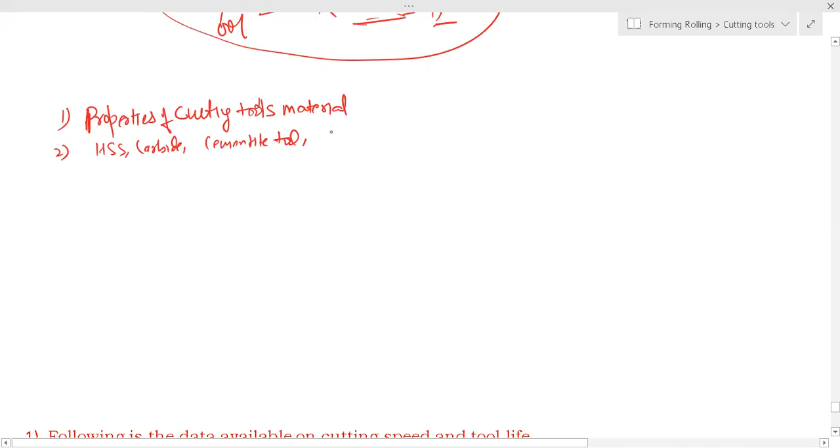We have started cutting tool material. We discussed cutting tool material properties, which we have completed, properties of cutting tool material that we have already completed and talked about. Then second, we talked about different types of tools, like high speed steel tool, carbide tool, cementite tool. We have talked about cubic boron nitride tool, CBN tool, and diamond tool. So properties of cutting tool material we already discussed.

I started from red hardness or hot hardness, then yield strength, ultimate strength, thermal conductivity, non-corrosive properties, everything we have already discussed. We have already talked about high speed steel tool, carbide tool, cementite tool, cubic boron nitride tool, and diamond tool.

We also talked about how you have to remember at least cutting speed, Vickers hardness, and the peculiar characteristics of each tool. At least 5 to 7 points you have to remember and understand for each.

For example, high speed steel tool has good toughness, but carbide tool does not have good toughness, though carbide tool is harder than high speed steel tool. Cubic boron nitride tool has the highest cutting speed. Diamond tool fails by rupture of the tool point. I have already talked about this in the last class, right? So you have to think like that.

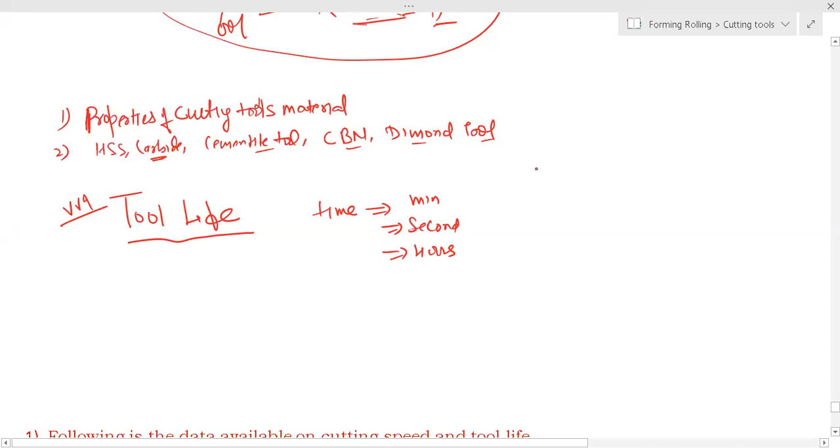It means one tool, we took a tool, we started machining, and suppose machining speed, or we call it cutting speed, is suppose 200 meter per minute. So at this speed we started, we took the tool, and we'll see when

first sign of failure. Failure does not mean complete breakage or complete rupture. Any sign of failure, it may be wear, tear, or blunting, anything. It means failure. It doesn't mean it is breaking.

Means if its function - cutting function, right? Function of a tool is to cut the material. If it's not working properly, it is not able to cut the workpiece, then its function has lost. Tool is to be replaced, or tool is not working properly.

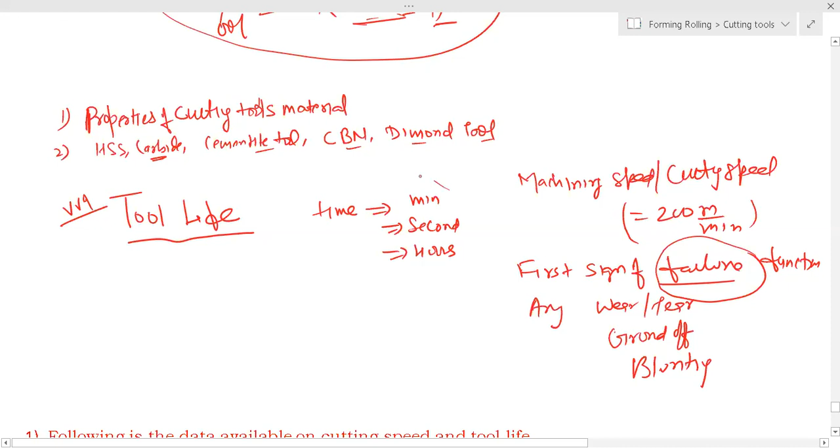So we have to measure time. Suppose it gives 30-minute time at 200 meter per minute. It means if cutting speed is 200 meter per minute, tool will last for 30 minutes, means half an hour. That means life of tool is half an hour at this speed.

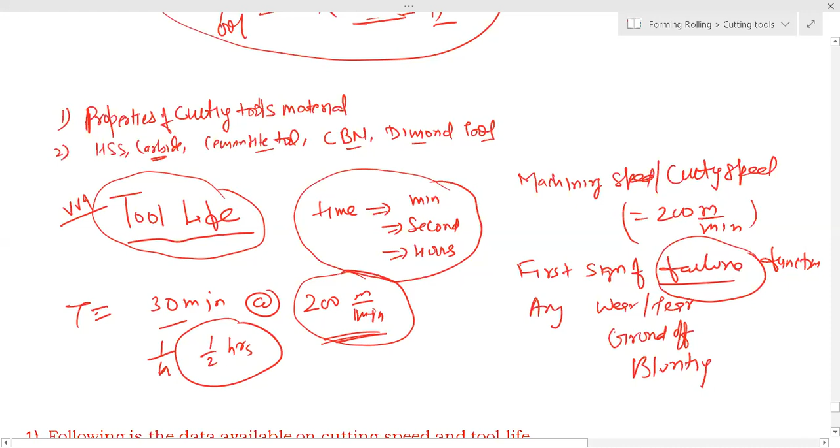So basically, I will erase all these things. Anybody want to write? You can write, I will erase. So

Life of tool is 30 minute at 200 meter per minute. That means after 30 minutes, you have to change the tool.

Change the tool means either you have to regrind it - what is happening, regrind it - or you have to dispose it. Disposal, you have to throw it.

So number of tool change - one term is called number of tool change. It means suppose if you want to machine a job and that requires 2 hours to complete the work, you require 2 hours total time. And tool life of a tool is half an hour at some fixed speed, suppose 200 meter per minute.

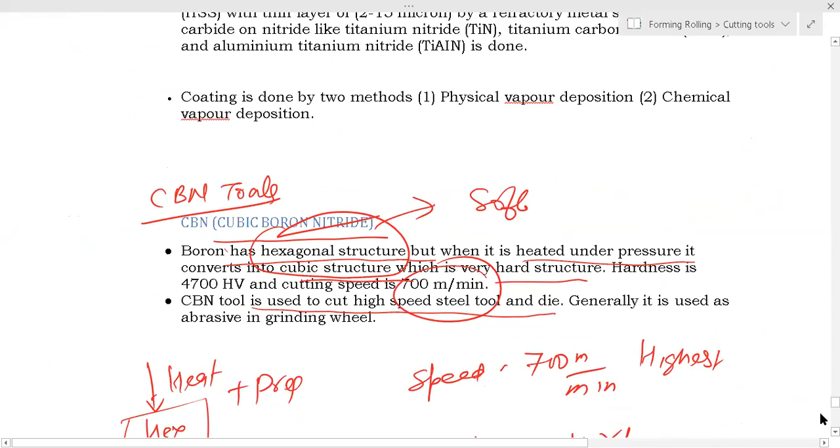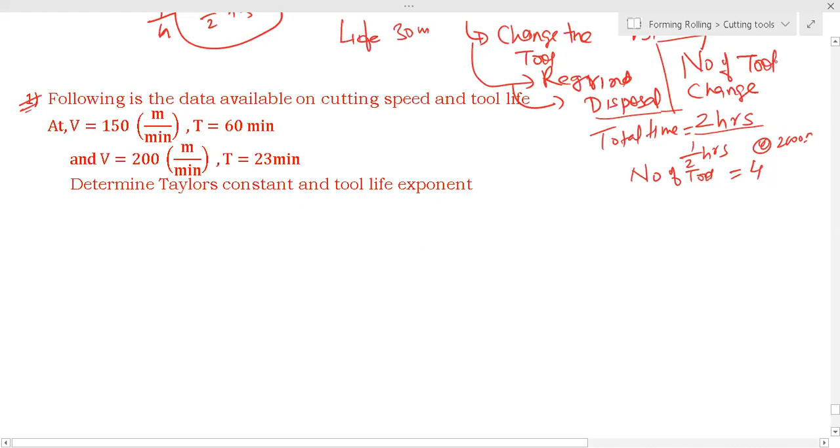Fine, so don't see now this problem, I mean this problem. Let us - so one is called generalized Taylor's tool life equation.

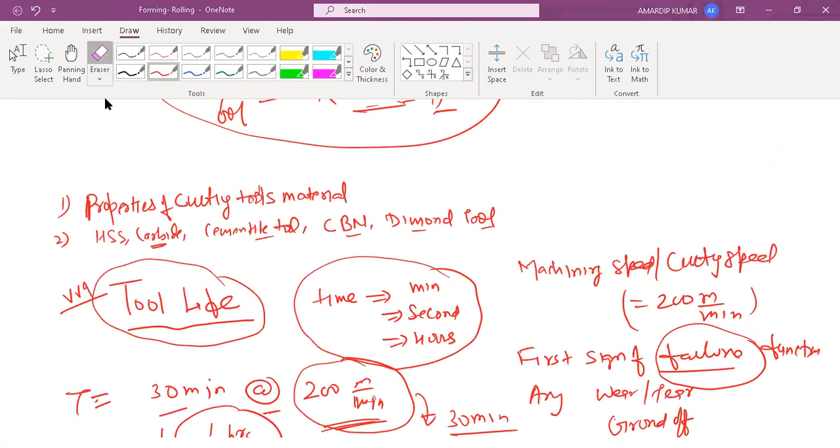This note, I don't know whether the note is slow or my system is slow.

So tool life definition we have understood, whether it is number of tool change or number of regrind, or

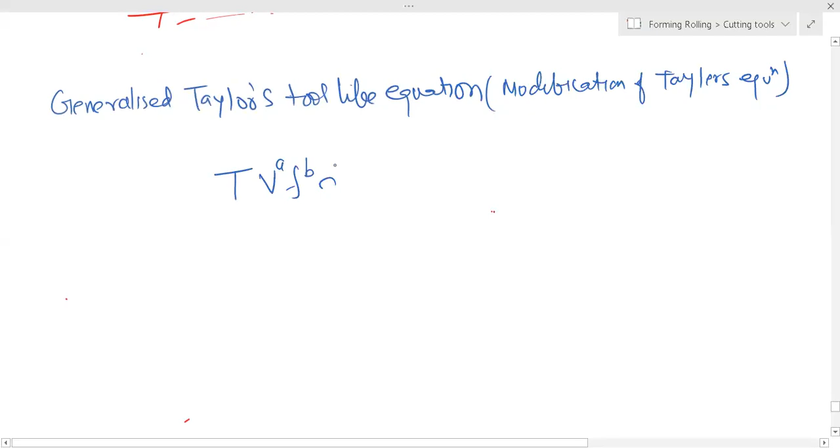What he said - where T is tool life, it will be in minutes suppose, and V is your cutting speed. It may be some meter per minute. You are doing cutting speed right now. Speed.

Then F is your feed, it is suppose millimeter per revolution or millimeter per minute. There are three types of feed that I will be teaching you later. And D is equal to depth of cut, it will again be in millimeter. It is depth.

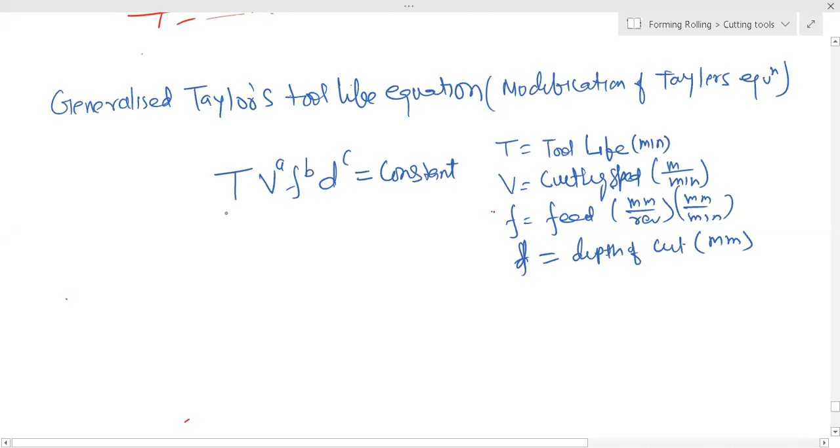So basically, tool life is a function of velocity, feed, and depth of cut. And again, A is greater than B, greater than C.

So T is equal to constant divided by V^A, F^B, and D^C. From this, we observe that anything increases

Sir, V is millimeter per minute or meter per minute? Meter per minute. Meter per minute. I have written, Nikhil. I have written. Okay.

So anything, whether it is cutting velocity, feed or depth of cut, if anything increases, tool life decreases. So anything increases, because everything is in a denominator.

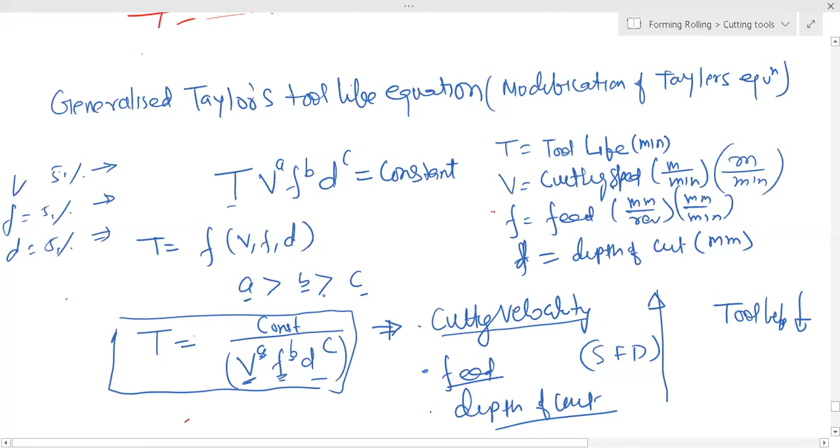But suppose velocity increases 5%, feed increases 5%, and depth of cut increases 5%. Which effect, the velocity increase, feed increase, or depth of cut increase, will affect tool life more? That will be decided by this power.

So here we see A is greater. So the effect of velocity on tool life will be maximum, then feed, then depth of cut. Now is it clear?

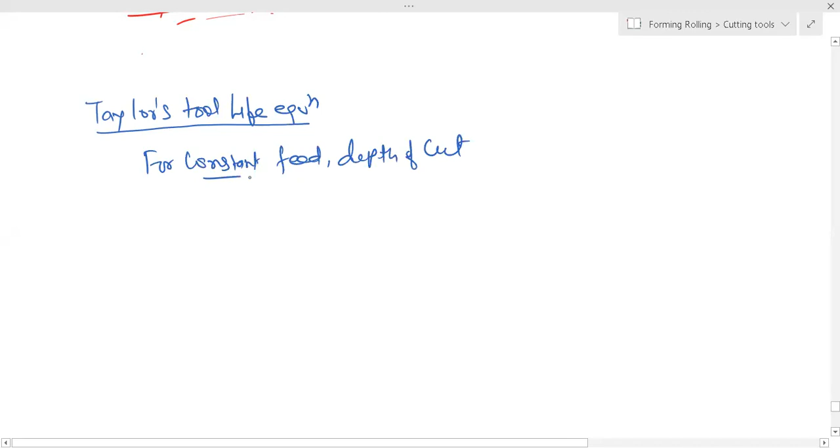For constant feed and depth of cut, meaning they are constant, we are not changing them, tool life becomes this. So here, for constant feed and depth of cut, there is a very simple relation, where n and C we call the machining constant.

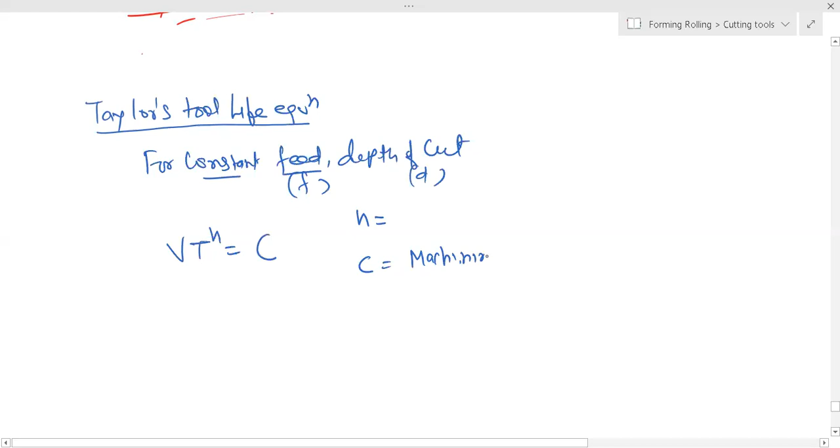Machining constant depends upon both the tool plus the workpiece. And this is called the tool exponent, which depends only on the tool material.

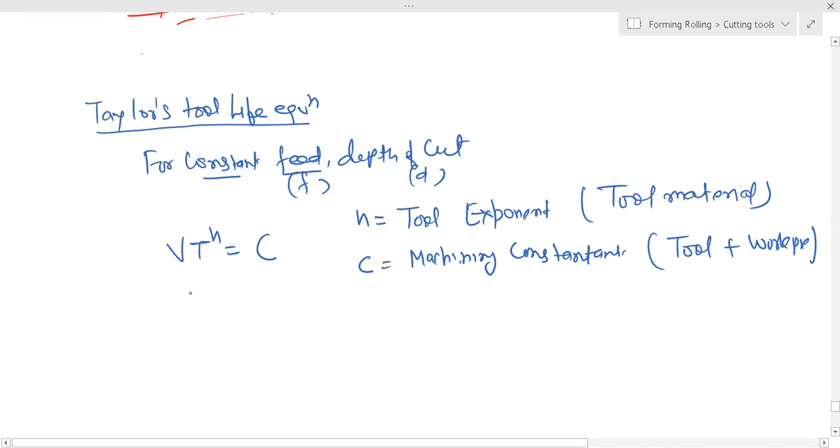So we can write this as a constant. So for two conditions, we can write like this: V1 T1 to the power N in one condition, and another condition V2 T2 to the power N.

This means at this cutting speed, this is the tool life; at cutting speed V2, this is the tool life. Because C will remain constant and N will remain constant, since the tool is the same. And this we can also relate, because V equals pi D N by 60.

So we can relate it with RPM also. So tool life can be expressed in terms of RPM, number of revolutions, as N2 T2 to the power N. And this can also be written in terms of nose radius, which I will discuss in the tool geometry details.

So VT to the power n equals 331 R raised to power 0.244, it means nose radius. R is your tool nose radius.

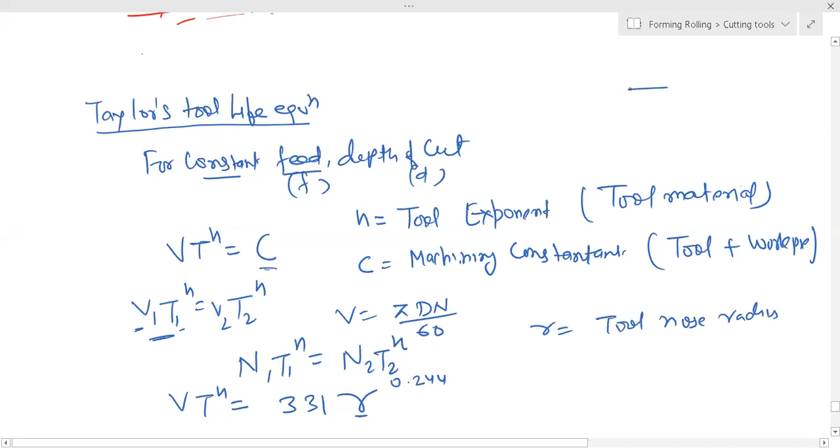Basically this is nothing, but when we discuss tool geometry, this is the nose radius R. So three views will be there: one will be the isometric view, the 3D view of the tool; then side view, top view, and front view. In every view there will be some angles, two angles, that we'll discuss.

So nose radius is in millimeters. So nose radius increases means tool life increases. So basically you have to remember this.

This is for constant feed and depth of cut. This is the relation. And for two states or conditions, if V1 is the speed and T1 is the tool life at this speed, and V2 is the speed and T2 is the tool life, we can relate like this also, V3, T3 to the power N, like that.

Again, rotational speed N, because diameter is constant, so we can write Taylor's tool life equation in terms of N, your RPM, cutting speed, or we can write it also in terms of nose radius. And this relation looks very simple, right? No, nothing much.

GATE will ask you, tell me the effect of nose radius on tool life. So as nose radius increases, tool life increases.

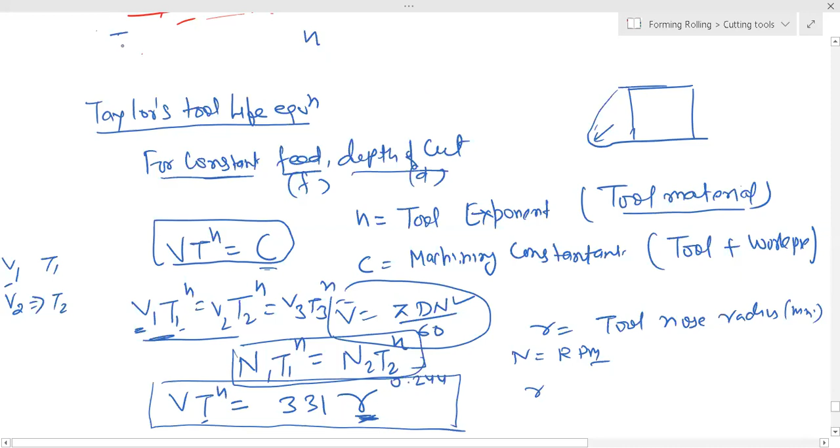This n value only depends on the tool, so this n value is different for different tool materials. For example, tool is here, I am writing, making a table - it's already there in the study material, but I am writing again so you can understand. Suppose this is your tool and this is your value of n.

So if the tool is high speed steel, the value will be 0.08 to 0.2. If it is carbide tool, the value will be higher, 0.5 to 0.8. And when it is ceramic tool, it will be 0.8 to 0.9 something - in your notes please correct this, there was a copy paste problem. I had written the same value of n for ceramic tool, but no, it is more. So when the value of n is more, what does that mean?

Value of n more means - you have the relation V T^n equals constant. So T equals constant divided by velocity to the power 1/n, right? So n more means this quantity is less, right? This quantity less means this relation holds - you have to understand, it basically gives the slope. So for high speed steel tool it is less, then it increases for ceramic.

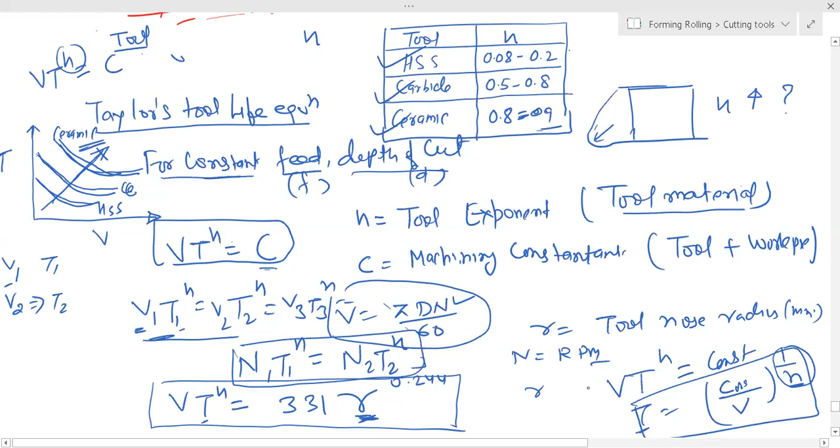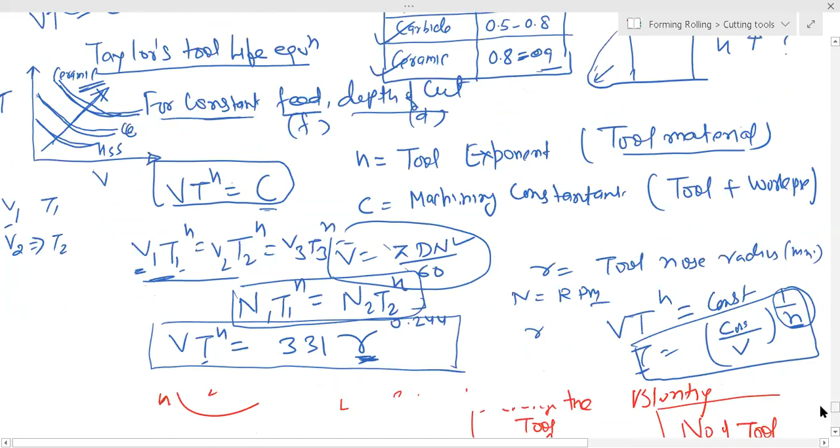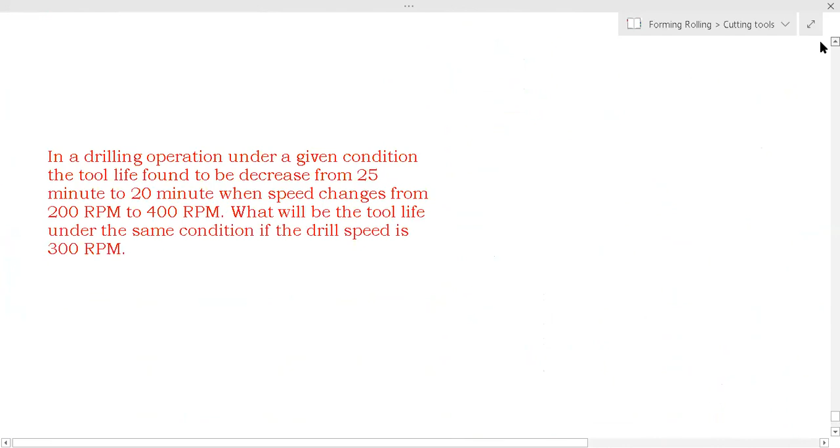Now we have some problems, we'll discuss some problems. First problem is in red color, right? Now what is that problem?

So this is our problem: following is the data available on cutting speed and tool life. You have velocity V and tool life this much, and velocity V and tool life this much. So determine Taylor's tool life constant, that is C, also called machining constant, and tool life exponent, that is n. So V T^n equals constant, so you have V1 T1 and V2 T2, n, constant, right? So you have equation 1, equation 2 - two equations and two unknowns.

You can solve it. So V1 is 150 meter per minute, and T1 is 60 minutes, and V2 is 200 meter per minute, and T2 is 23 minutes. You see, when speed increases only 50 meter per minute - change in speed is only one third, right? It was 150, now 200. But earlier tool life was 60 minutes, now reduced to 23 minutes. It means the curve is like this.

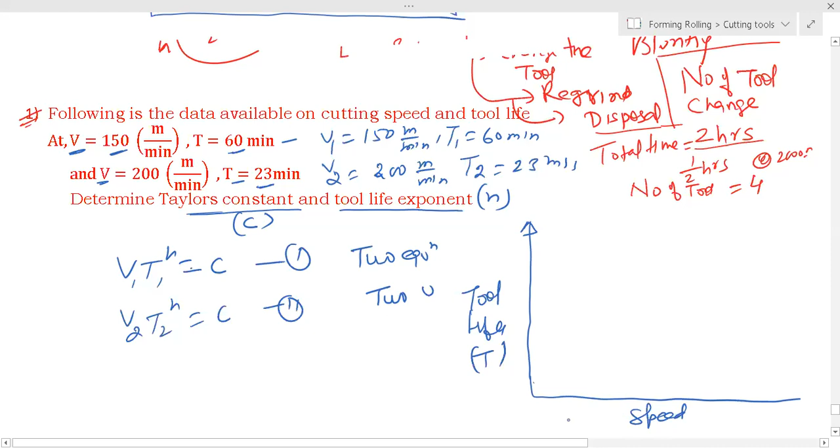This is your tool life, that is T, and this is your speed, cutting speed or machining speed - don't confuse, it is sometimes called cutting speed or speed, that is V. So it decreases like this.

It means exponentially, right? Because the relation is this: relation between V, T, and C. So it is like this curve, it decreases.

So there will be a sudden change if you change this much. If speed you are changing this much, tool life will change this much. So it is not linear, it is exponential decrease.

So when speed is more, a production engineer will always look for higher speed, because if speed is more, production is more, in less time they can machine more components. But when speed increases, tool life decreases, there will be frequent tool failure, and every time you have to change the tool, that requires time, that is tool change time.

When we discuss economics of machining, everything will come into picture, whether tool cost, tool changing cost, machining cost, raw material cost. Finally we will minimize to find what will be the cutting speed for optimum efficiency and what will be the cutting speed for minimum cost. Everything will be discussed in economics of machining.

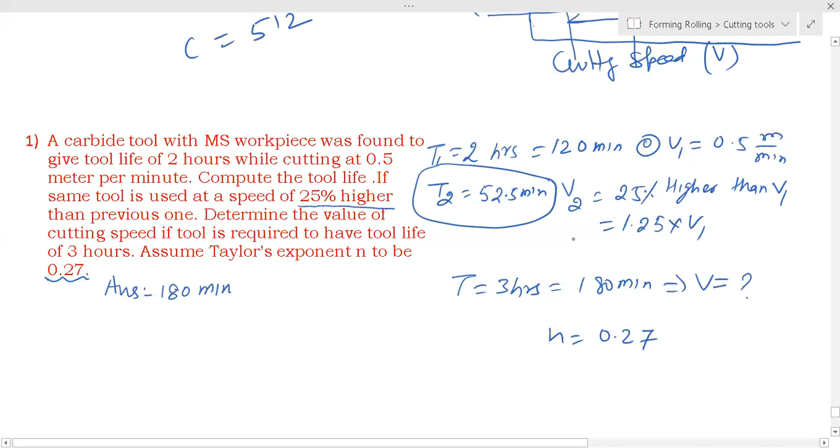52 minutes, very nice Ashish. Ravichandran ji, nice. Sir, I am confused by this question because it is asking to calculate speed while it is saying it.

Compute the tool life, there are two questions, man. First they are asking about the tool life. So up to here you have one question, and then you have another question. This is question A, this is part B.

Yes, 52.5 minutes is the answer, you got this. What about this velocity? Now using this, you calculate N, calculate C here, then you are having N and C value. Putting this, then you can calculate V.

What is the V answer? B. V is 0.5. What is the V? 0.448.

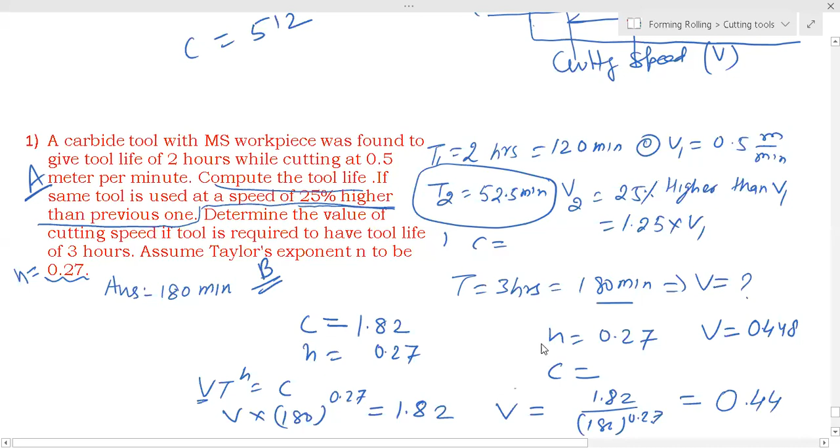Okay, next. Solve this question. This is the question. In a drilling operation under a given condition, tool life found to decrease from 25 minutes to 20 minutes when speed ranges from this to this. What will be the tool life under the same condition if the drill speed is 300 RPM?

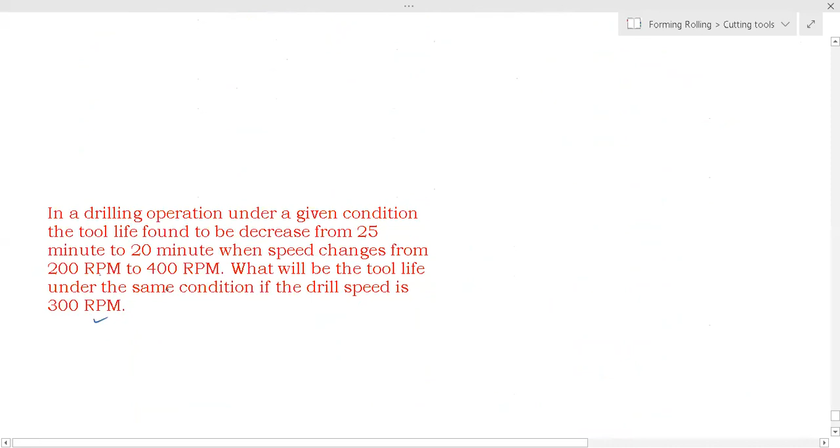So tool life found to decrease from 25 minutes to 20 minutes. This was at 200 RPM, and this was at 400 RPM. Right now, what will be the tool life when RPM N is 300 RPM?

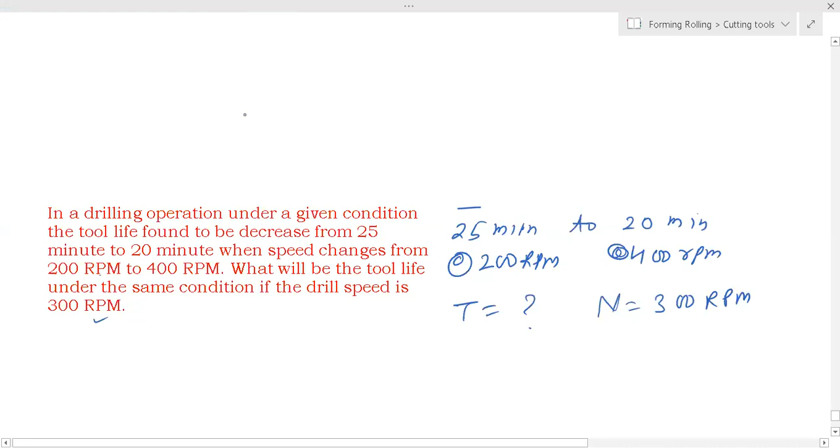So simple: N1 T1^n is equal to N2 T2^n. What is it? N2 T2^n is equal to N3 T3^n. So you have to calculate T3. From this you calculate n. Then finally put in this equation to get T3.

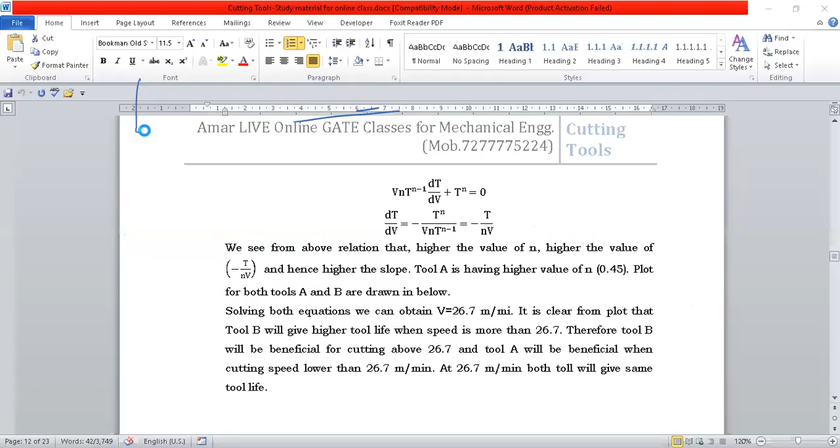So you have N1 is equal to 200 RPM, and T1 is 25 minutes. Then you have N2 400 RPM, and T2 20 minutes. You have N3 300 RPM.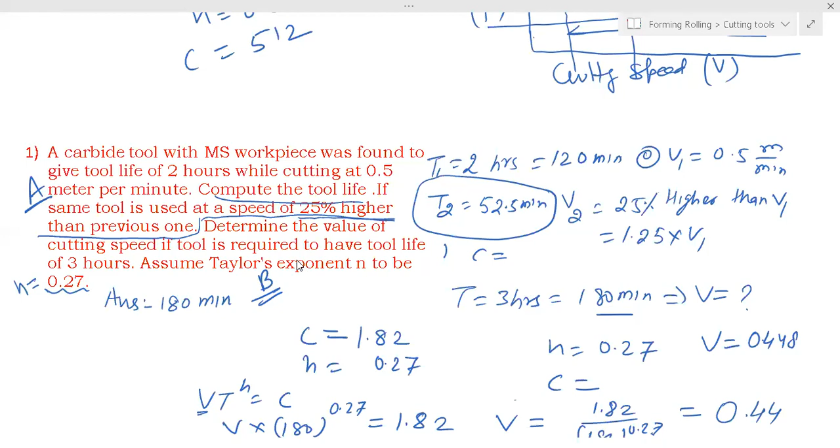So T3 will be between 25 and 20. So if the answer is between these two, then it is fine. 21.9. So the answer is 21.9.

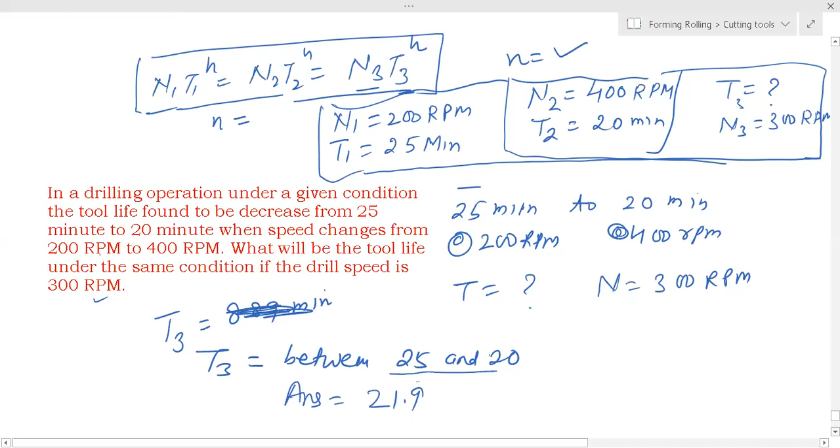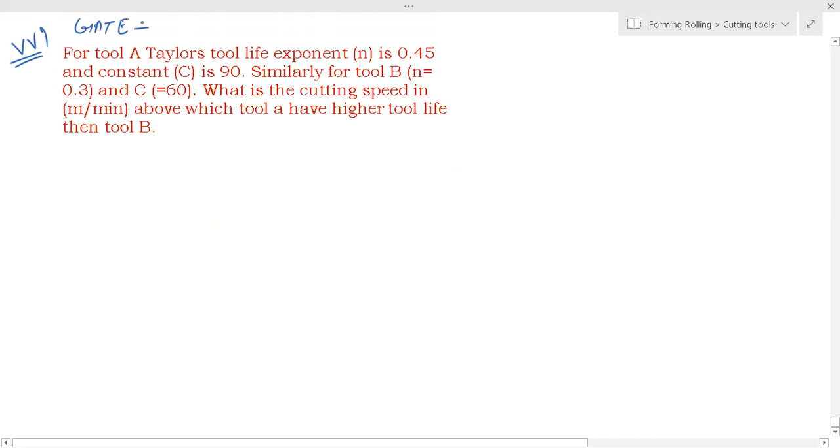Now we solve this problem. This is the problem, solve this. Gate has asked this more than 5 times.

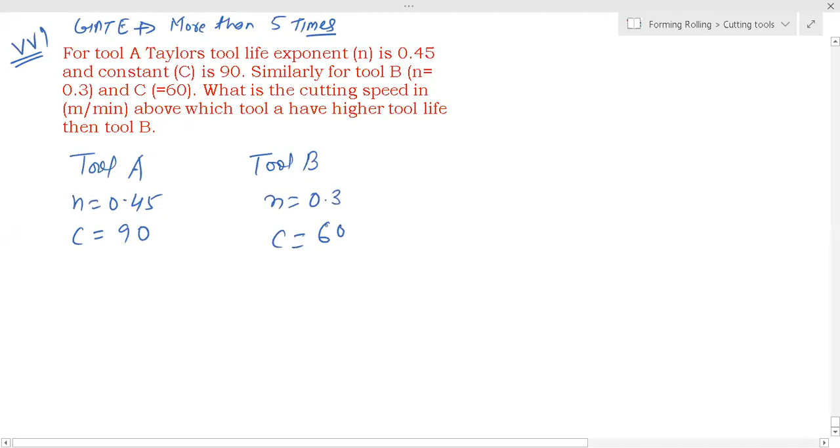For a tool A, Taylor's tool life equation is this. So tool A, your n is 0.45 and C is 90. Similarly for tool B, you have n is 0.3 and C is 60. What is the cutting speed at which tool A has higher tool life than B?

So you have to find out the speed so that tool A has higher tool life than B. Means you have to find a speed V above which tool A is having higher life than B. Means you have to find a speed where tool A will give higher tool life than B. That is the problem.

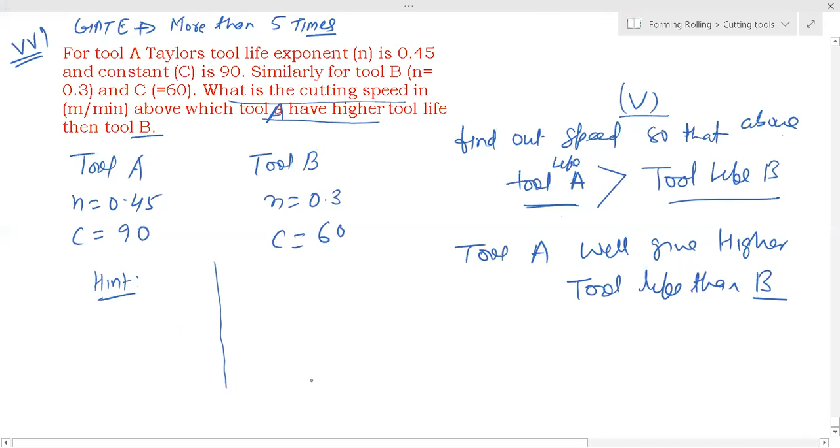I give you a hint. Suppose I draw a curve like this: tool life versus velocity. Suppose one tool is tool X and this is tool Y. I'm just giving a hint about tool Y. It means at this cutting speed, both tools will give the same tool life.

Again, I am telling you, please concentrate. I'm giving the hint. At this cutting speed, suppose 20 meter per minute, this point I am talking about. This is tool X, and this is tool Y. So at this cutting speed, suppose this is 30 minutes. At this speed, 20 meter per minute, both tools will give the same tool life.

But if speed is 25 meter per minute, here this is the tool life of tool Y, and this is the tool life of tool X. So when cutting speed is 25 meter per minute, tool X will be better and tool Y will give less. Suppose this is your 20, this is your 25. So when cutting speed is 20 meter per minute, both curves intersect each other at a common point for both, and this is your velocity, this is your tool life. So at this speed, both tools will give the same tool life.

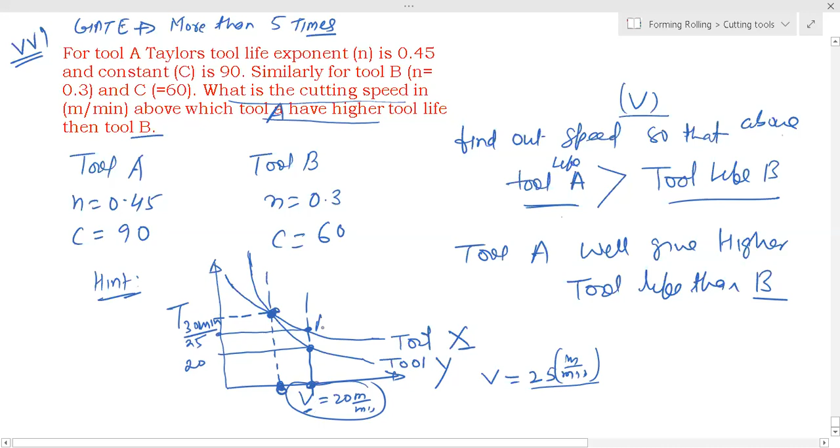But suppose your speed is 25 meter per minute, higher than this point, meaning right side, it will shift right. So when you draw a vertical line, it cuts two curves, suppose at A and B. So A is at X and B is at Y. So X will give higher tool life than Y. But if velocity is less than 20 meter per minute, suppose 15 meter per minute, then your curve will shift. This is the 15. So here it will be like this and this.

So this tool Y will give you more tool life than tool X. If you understood this, then you can solve.

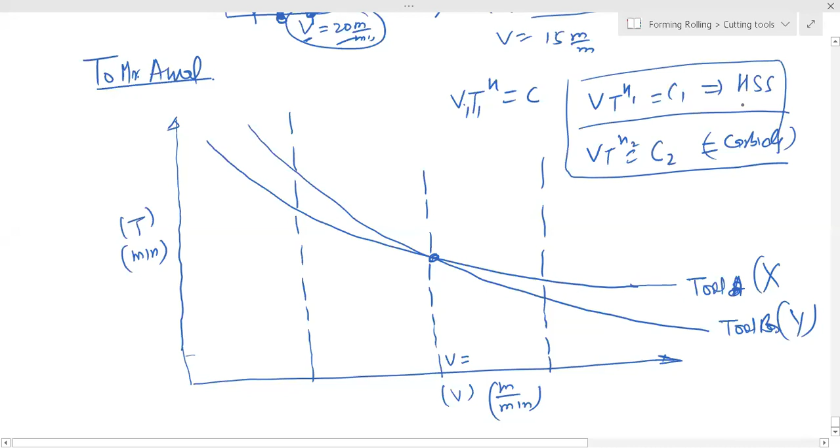So you have two equations. Now somebody asks you, you have two equations - this is your carbide tool, and this is your high speed steel tool.

Somebody asks you which tool will be beneficial if cutting speed is 20 meter per minute. So the value of N and C1 is different for high speed steel tool and carbide tool. So first, suppose in your problem it is given value of N1 and C1, and value of N2 and C2 is given. So you can draw this curve.

You can draw by checking dt by dv, just to check the slope, which one is having a higher slope. This guy is having a higher slope, and this one is having a lower slope.

Now there is a point at which both tool lives are same. This is the break-even point. Break-even means, suppose this is your 20 meter per minute. When you solve equation 1 and 2, you will get this point - you will get V and T.

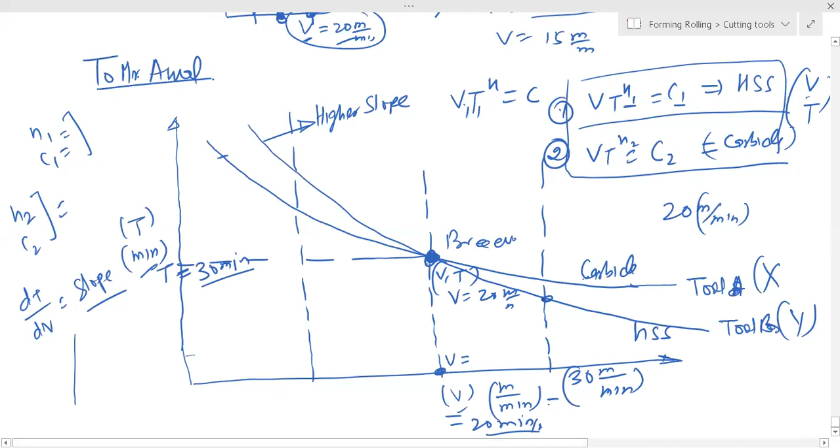When speed is more than 20 meter per minute, suppose 30 meter per minute - this is the tool life of high speed steel tool, and this is the tool life of carbide. So when cutting speed is 30 meter per minute, more than 20, the carbide tool will be good because it gives higher tool life.

But when velocity is suppose 15 meter per minute - this is the tool life of carbide tool, and this is the tool life of high speed steel tool. So when speed is less than 20 meter per minute, that is 15 meter per minute, high speed steel tool is better as compared to carbide tool.

And when speed is 30 meter per minute, carbide tool will be better. So to solve this problem, first you have to solve for this point. Once you solve for this point, you have to check the slope - you have to draw these two curves by slope, dt by dv, so it will be minus 1 by n. You have to check the slope, then you can do this analysis.

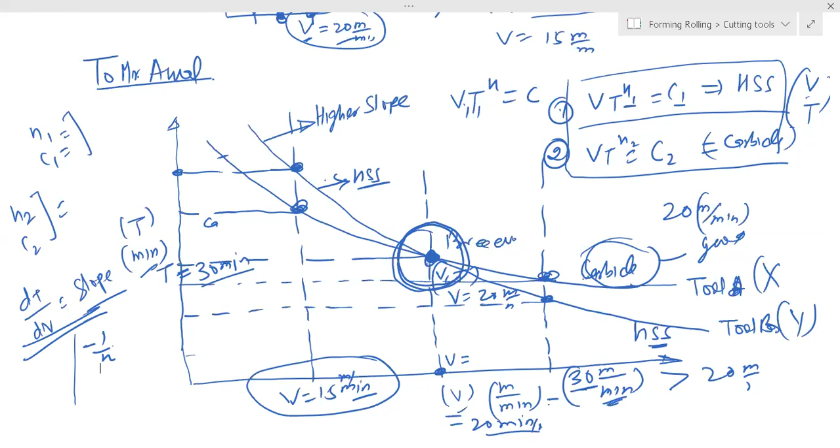All tool problems you have to solve. It is there in your notes. Hints are there in your notes.

All break-even point.

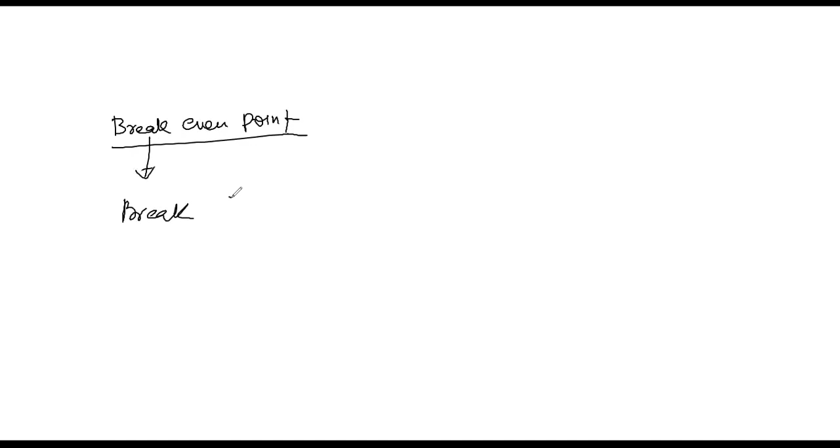Can you see break even point? I have written. Fine. So it is break even means equal. What is break even point?

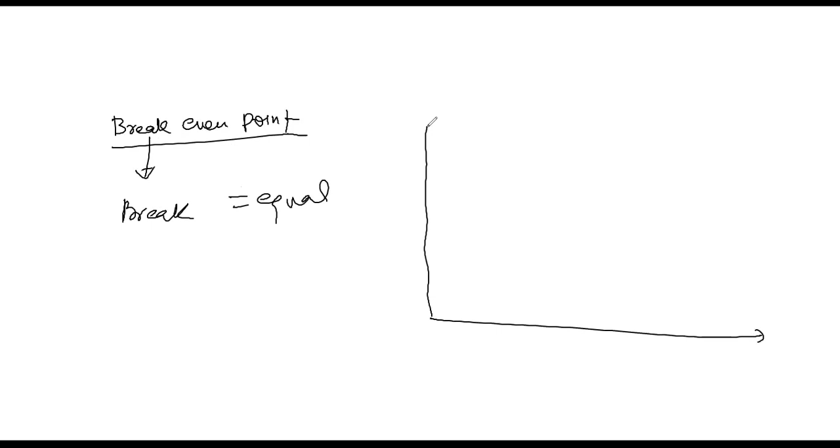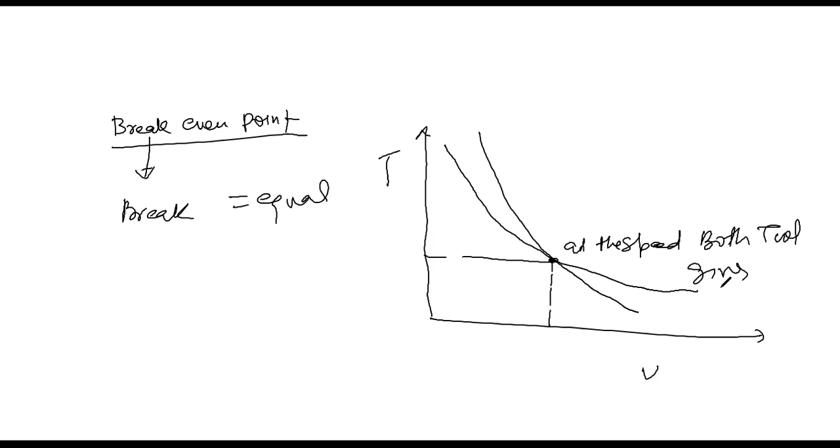It divides. So you have t, you have velocity v, and you have one curve like this, and then you have another curve like this. So at this point, both curves give equal at this speed. Both tools give equal tool life. That is break even point. So this point we call actually break even point.

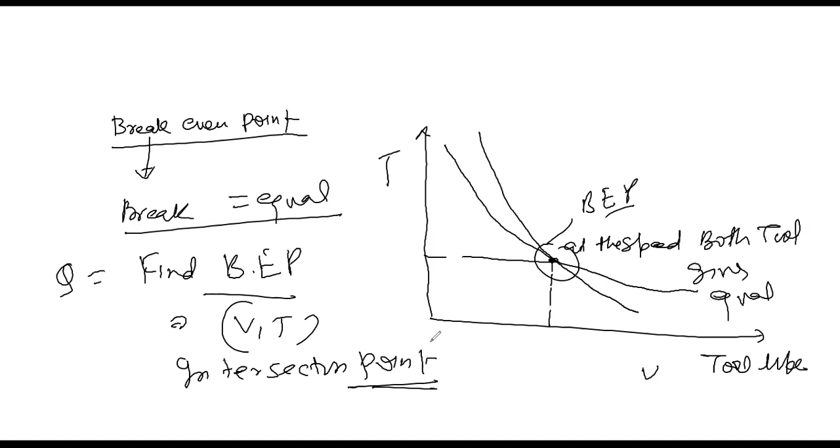If your question is find break even point, then simply find that V and T where the intersection point is, simple. But when it is beneficial, then you have to check this break even point total cost. Suppose if you want to break even point, I will teach you that in industrial engineering. Industrial engineering break even point I will teach you. Break even point. So total cost.

Total cost is equal to fixed cost plus variable cost. Variable cost is NV, where N is the volume. So at what volume the total cost, right now that is total fixed cost plus variable cost, it will be equal to revenue.

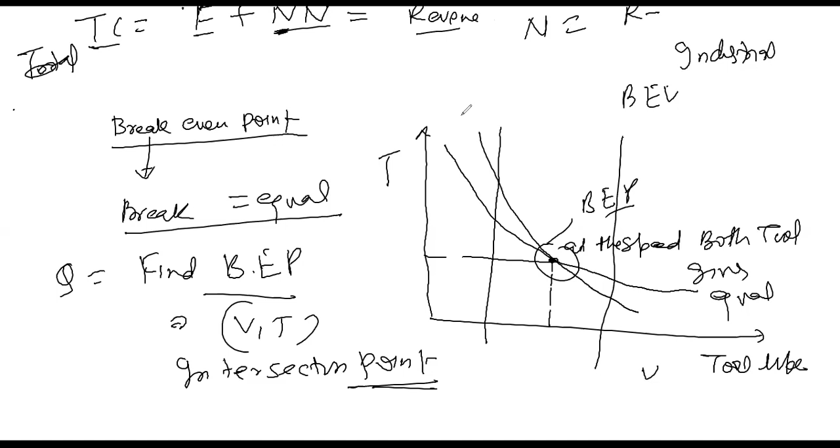N will be equal to R minus F. So fixed cost plus N into V, right now. So F plus NV is equal to N into S. This is fixed cost, this is the volume, this is the variable cost, this is the quantity, that volume, and S is the selling price. So N is equal to F divided by S minus V.

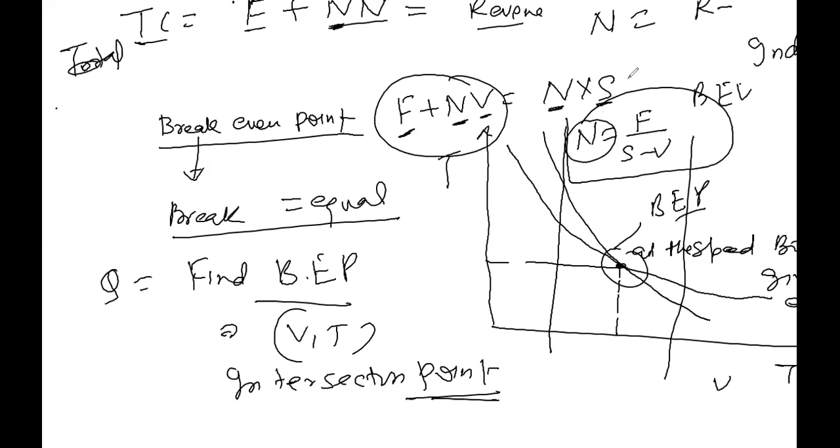This is called, at this number, total cost will be equal to total selling. That we call actually break even point. So this is the break even point. Means this is your fixed cost, this is your variable cost, so this is the total cost, right? And this is your revenue.

So this, we'll discuss break even point for time being, just to understand that where both tool lives give equal tool life at this speed. So we call it as break even point. Equal tool life. Equal tool life.

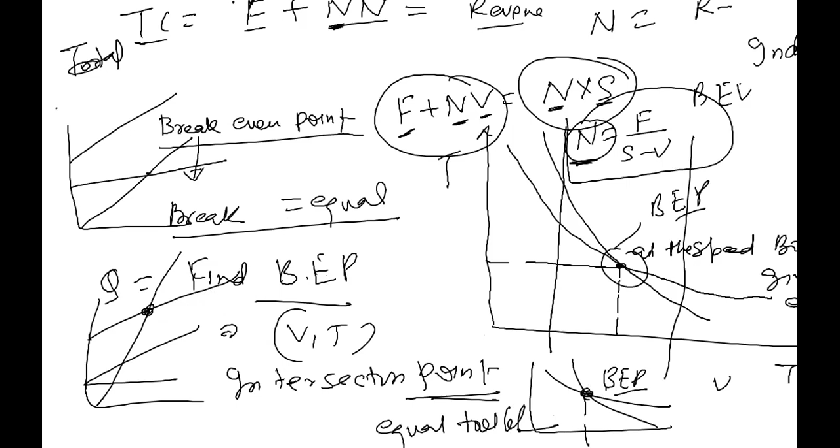Understood this, Rajat? Did you get these concepts? Okay, so we'll discuss now tomorrow or day after tomorrow.

I will send you all gate question papers now. First you have to solve all your notes problems, then gate questions, everything. You have problems in notes, so your notes, there are total I think 9 problems in it.

It is always intersect for different value of n. No, it depends, it will depend, but when it intersects there is a... Sir, can you please give an abbreviation to the formula?